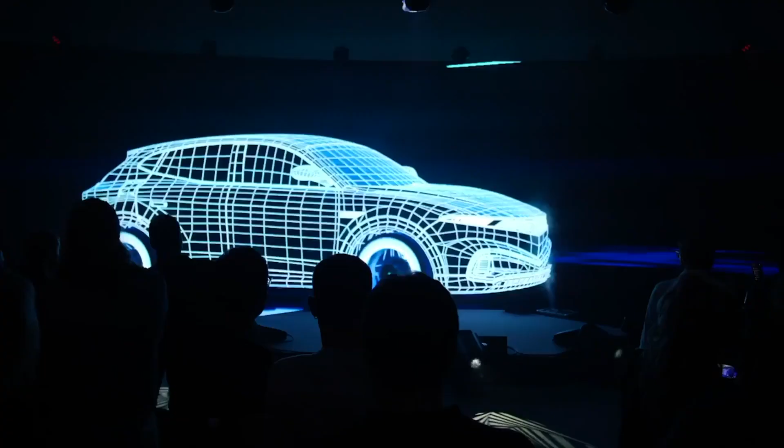The Zero Prototype Summit, or ZPS, is our annual 3-day flagship event. This is hosted at our VI Grade Sim Center in Udine, Italy, and is focused on the latest technology in simulation, driver-in-the-loop simulators, and hardware-in-the-loop for vehicle dynamics, NVH, ADAS, HMI, and motorsport applications. It's tailored to customers, partners, and prospects from global automotive OEMs, Tier 1 suppliers, universities, and research centers.

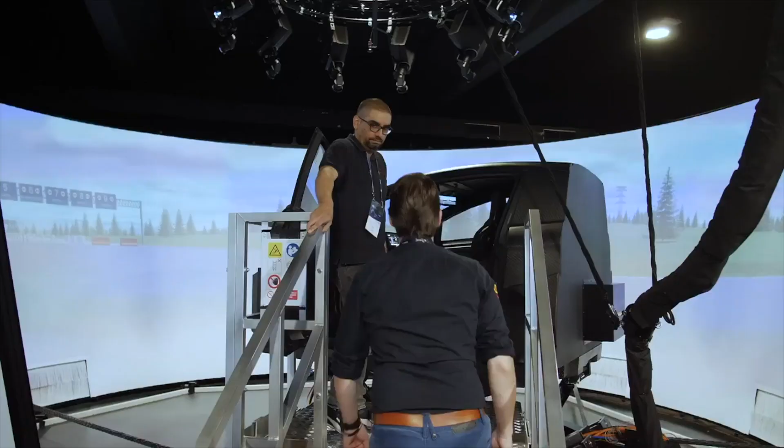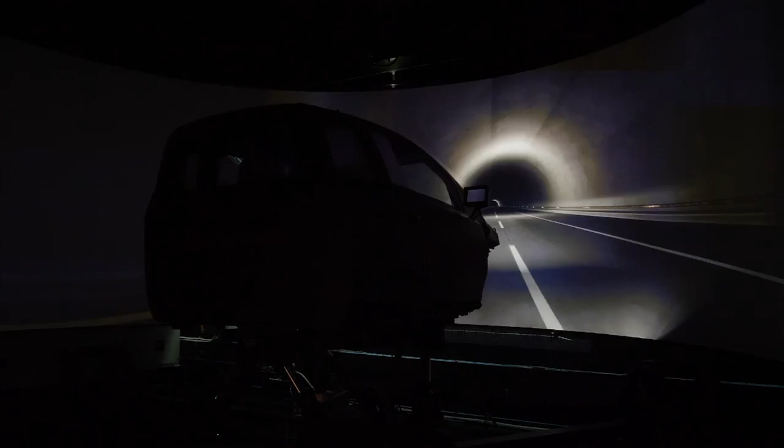It features customer presentations, live demos, software training, user groups, and numerous networking opportunities. It showcases virtual tests towards the zero prototype vision. So that's the zero prototype vision that VI Grade has created and been promoting, including simulation software, driving simulators, hardware-in-the-loop technology, and more.

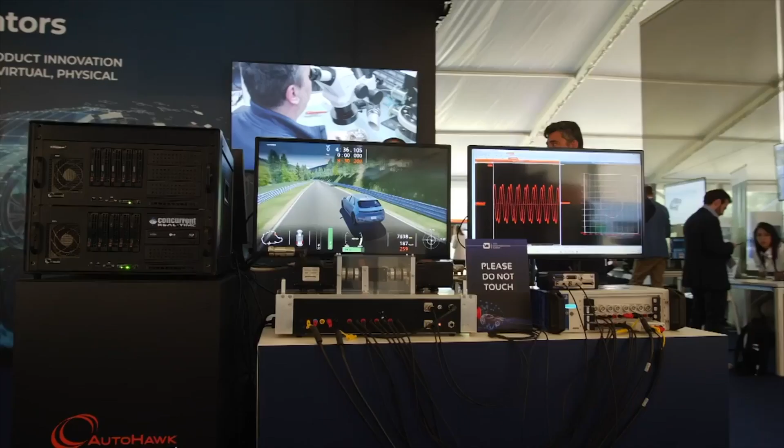There were nearly 300 in-person attendees from 24 different OEMs and 17 different Tier 1 suppliers and service suppliers, and 6 different academic research institutions. We also had 27 industry sponsors.

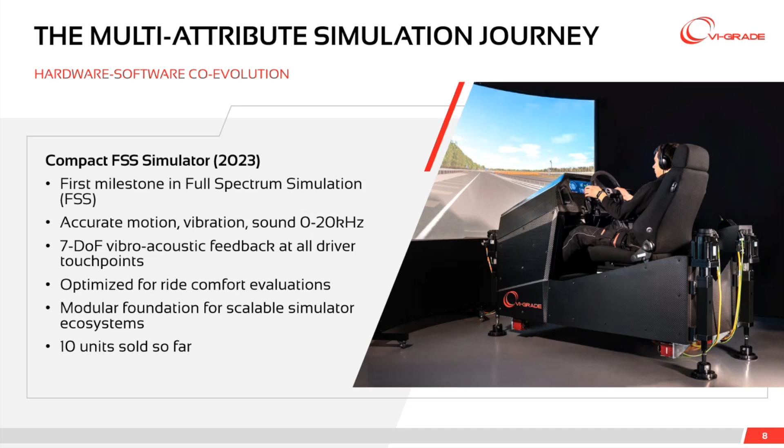In the Compact FSS, motion and low-frequency vibration are provided by the 4 corner leg actuators, and higher frequency vibration is provided in 7 degrees of freedom with shakers at the steering wheel, seat, and floor positions.

Last year, we announced the Full Motion Full Spectrum Simulator, expanding on the multi-attribute theme and bringing together a 9 degree of freedom motion platform with the new HyperDock cockpit. The Full Motion FSS is the first and only real-time dynamic driving simulator that provides a complete experience of accurate full motion, vibration, and sound over the full spectrum from 0 to 20 kilohertz.

The key enabler of the DIM FSS is the HyperDock. The HyperDock is the highly optimized carbon fiber cockpit with individual shakers at all driver touchpoints to deliver accurate vibration to the driver in 7 degrees of freedom, along with highly accurate sound.

Both the Compact FSS and DIM FSS are already very successful, with several companies already adopting them in their development cycle. To date, 10 customers are utilizing the Compact FSS, and a further 4 have invested in the DIM FSS and HyperDock technology.

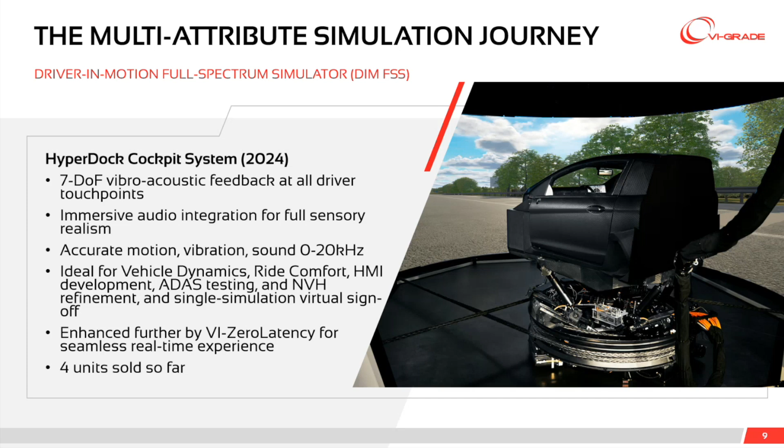In the last 10 years, VI Grade kept developing simulators with increased acceleration capability, minimized latency, and improved dynamic quality. We have made virtual driving more accurate, helping engineers make confident design decisions based on the feel and behavior of digital virtual prototypes. Now, we are launching a new product, the newest member of the VI Grade driving simulator family, and the latest step in the multi-attribute journey, the 6 degree of freedom motion platform, HexaRev.

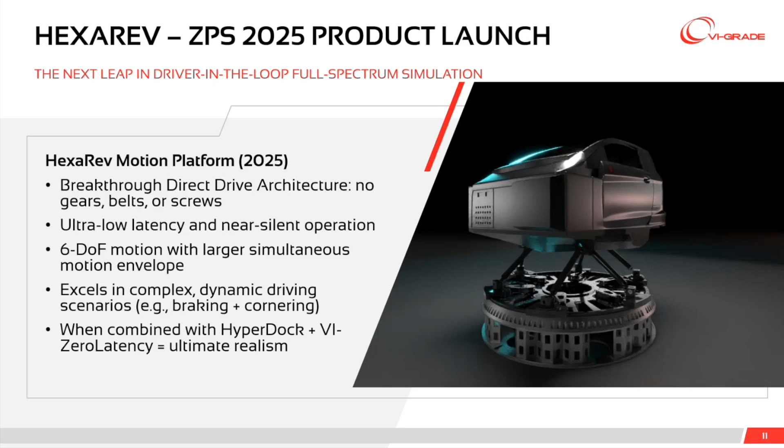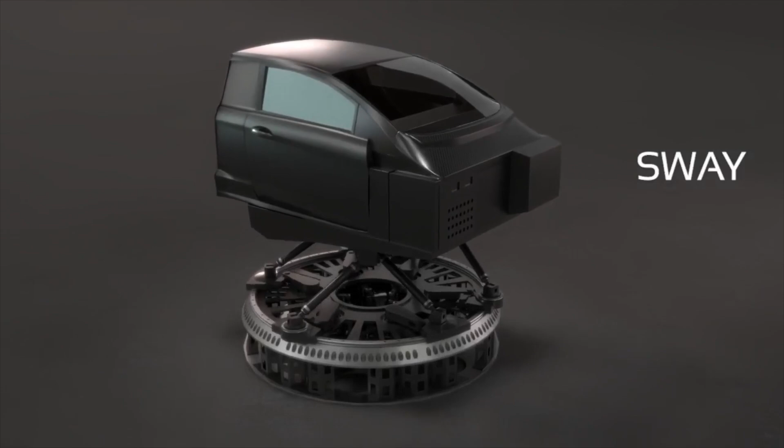This is the HexaRev, a completely new 6-degree of freedom motion platform with ultra-low latency and near-silent operation. The HexaRev platform is VI Grade's most advanced motion system to date. It combines mechanical innovation with a simplified design to deliver a driving experience that is smoother, quieter, and more immersive than anything previously available.

At its core, HexaRev is a high-performance, high-precision, 6-degree of freedom platform capable of generating exceptionally accurate vehicle motion. With no gears, belts, or ball screws, sources of mechanical play, latency, and noise are eliminated. Motion is immediate and virtually free of unintended spurious vibrations.

The HexaRev offers a significantly larger simultaneous motion envelope compared to traditional 6-degree of freedom systems. Traditional platforms experience a reduction in motion range when multiple degrees of freedom are active, making complex maneuvers less realistic. In contrast, HexaRev maintains a larger motion envelope even during complex multi-axis movements, delivering about 50% greater motion envelope capability relative to its footprint.

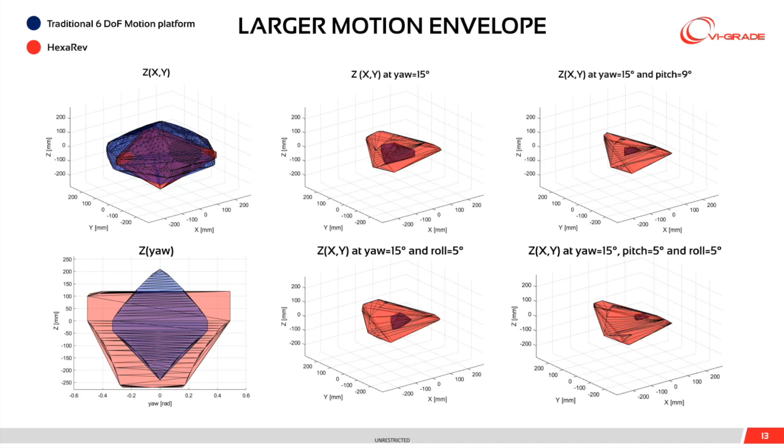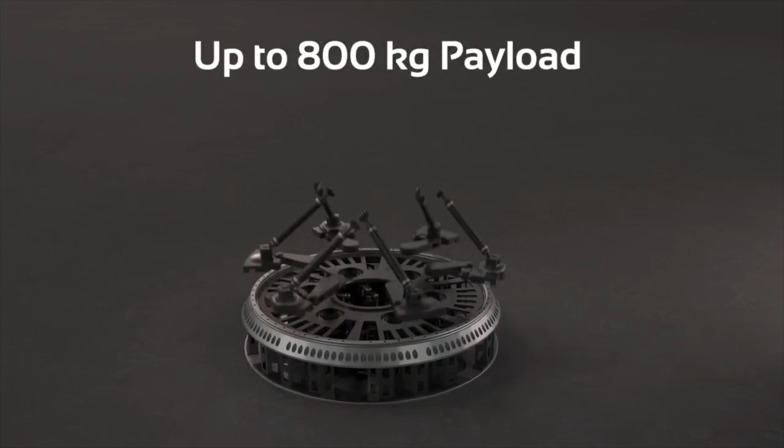Now let's take a closer look at the architecture that powers the magic of HEXAREV. The system is built around 6 motors concealed within a circular frame, each connected to a carbon fiber rod. These 6 elements work together to drive a platform that supports the cockpit, ensuring seamless motion control. This design guarantees a nominal payload of up to 800 kilograms, delivering exceptional performance and stability.

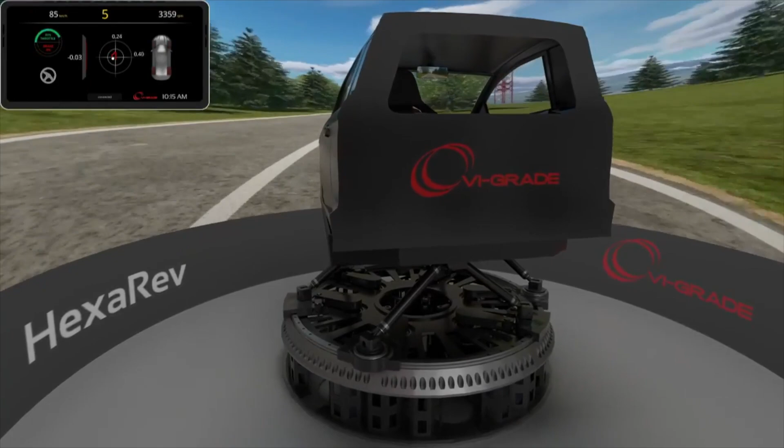Combining the HEXAREV motion platform with the HyperDock cockpit results in a full spectrum simulator. This integration marks a significant step forward in our commitment to multi-attribute simulation, enabling engineers to better evaluate ride, handling, NVH, steering feel, and other critical attributes within a single unified environment. It represents the next evolution in our technology roadmap, pushing the boundaries of what's possible in virtual vehicle development.

With the combination of HEXAREV and HyperDock, we deliver a driving experience that sets a new benchmark for realism and precision. The system provides true 6-degree of freedom motion to replicate vehicle dynamics with exceptional fidelity, along with vibration across all driver touchpoints, ensuring that every nuance of road surface and vehicle response is accurately conveyed.

Complementing this physical realism is an immersive and precisely engineered audio environment that captures the full spectrum of vehicle and road sounds. Together, these elements create a seamless simulation experience that enables engagement with digital prototypes as if they were real vehicles.

One of the key features of HEXAREV is its modularity with existing VI-grade technology. In particular, it allows for seamless switching between compact, HyperDock, and racing cockpits. Add to this VI-grade zero latency technology, and the result is an unmatched simulation environment where human drivers can experience ultra-realistic driving sessions with their digital virtual prototypes and make critical design decisions with confidence.

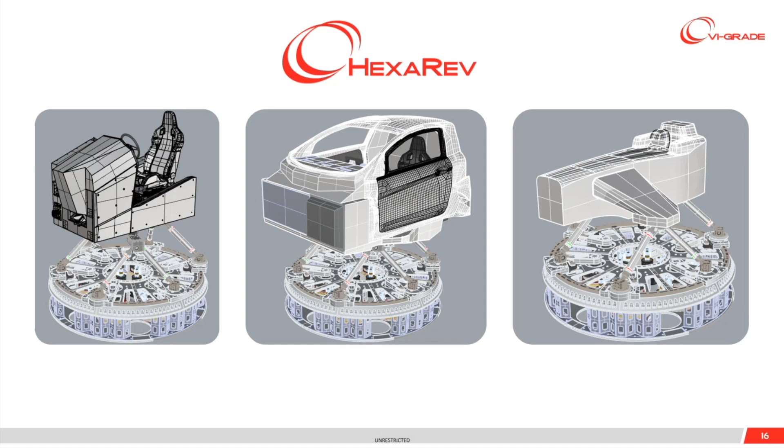So the next major announcement from our 2025 Zero Prototype Summit is VI Data Drive Cloud. Vehicle development is more complex than ever, with deep software integration and a need for realistic, large-scale simulation. That's why we built VI Data Drive Cloud, a cloud-native platform offering scalable computing, centralized data, and team collaboration.

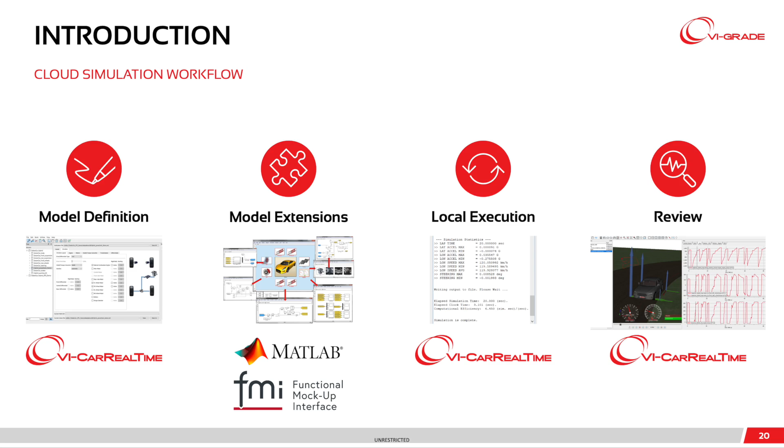Fully integrated with VI CarRealTime, it enables parallel simulations for high-performance runs, DOEs, and diagnostics, breaking hardware limits and accelerating insights. With support for plugins, FMUs, and actuator extensions, as well as customizable post-processing, it's built for real-world development at scale.

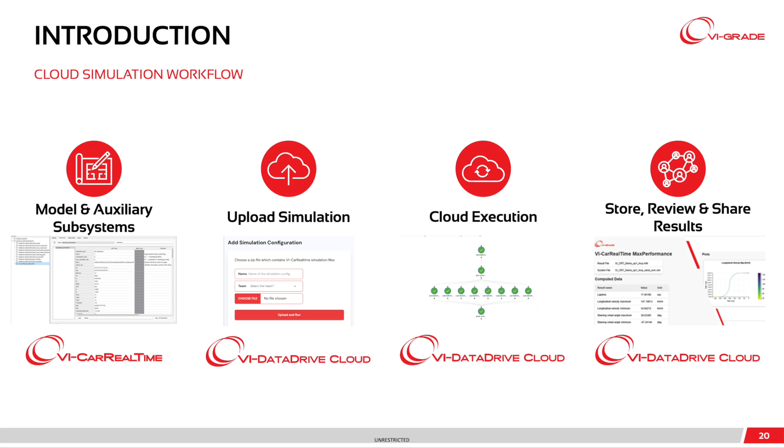This is part of VI-grade's DataDrive vision, where offline simulation, driving simulators, and cloud computing come together to fully support the digital workflow, enabling and accelerating the development of software-defined vehicles. VI-DataDrive Cloud gives you scalable and efficient simulation, increased flexibility, better teamwork, and ultimately gives you the answers you need for faster decisions.

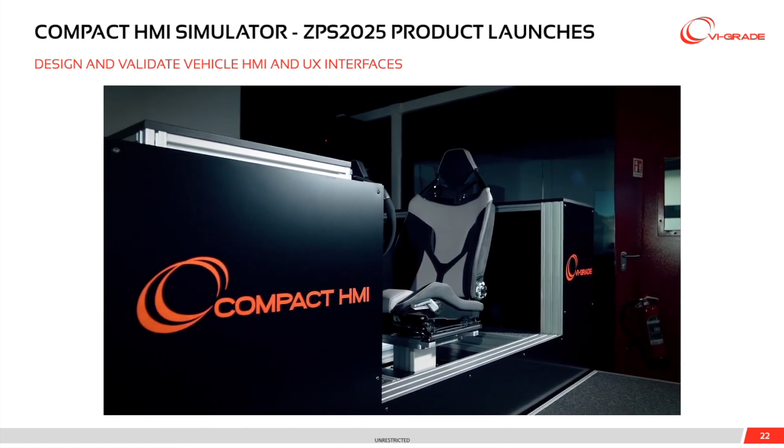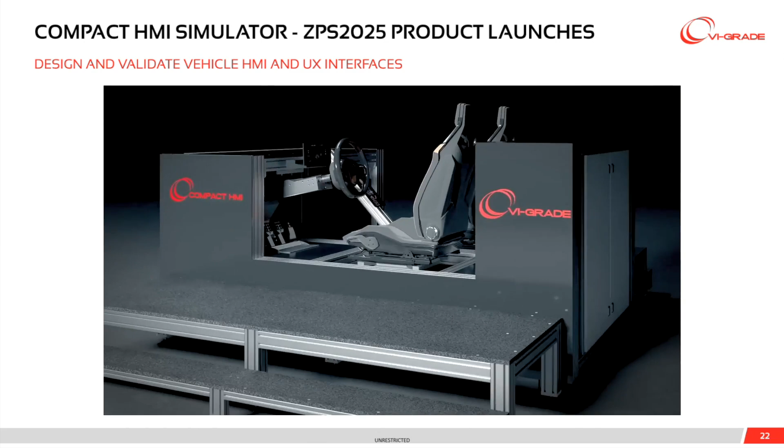And the final product announcement for the 2025 Zero Prototype Summit, we have the compact HMI simulator. HMI studies are often carried out on static vehicle bucks or bespoke mock-ups that are only suitable for that vehicle type. When adjustable mock-ups are used, they're often only that, adjustable mock-ups, able to assess positioning and content of the HMI systems, but not including any capability to really drive the vehicle and assess the HMI under driving conditions.

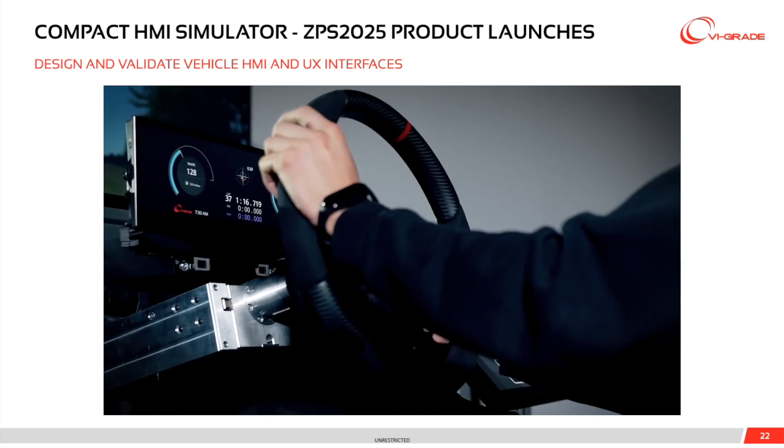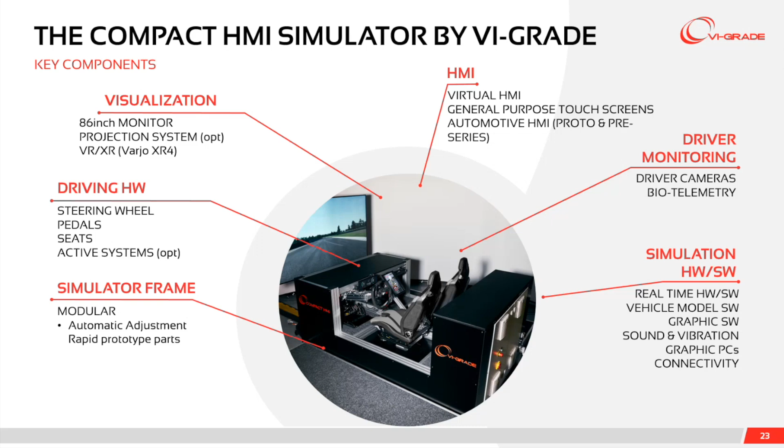The compact HMI simulator is designed to accelerate HMI development by merging flexible interior simulation with realistic, real-time driving experience, AI-powered traffic scenarios, and hardware-in-the-loop and software-in-the-loop integration. The compact HMI simulator is highly adjustable and provides the ability to simulate the driving position for many different types of vehicles in a single simulator.

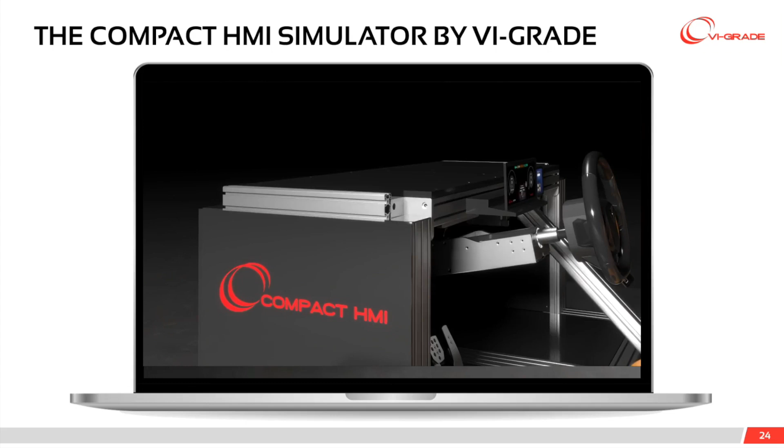The wheel and dash height can be adjusted along with the wheel angle and position. The pedals adjust vertically, fore, aft, and laterally. The seats also adjust in all three translational directions. And all of these adjustments can be controlled through a tablet touchscreen interface, and saved configurations can be recalled and applied in an instant, enabling quick transitions between different vehicle setups.

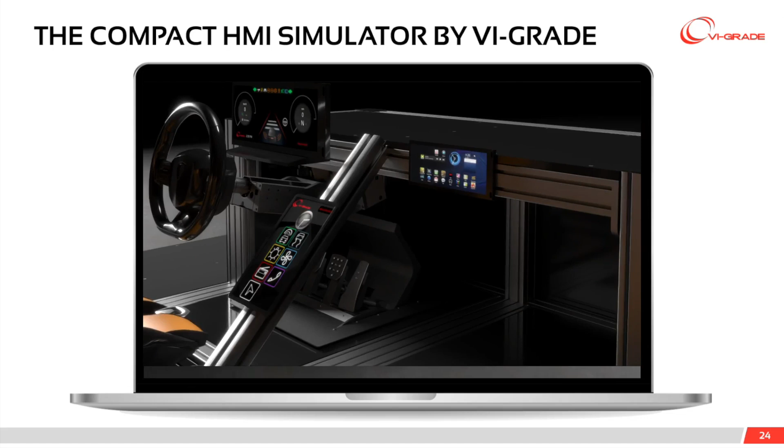The compact HMI simulator can adjust to the seating positions of virtually any passenger car vehicle, from sports cars to SUVs. Provided with 3 screens for customizable content, any number or type of screens can be easily added and positioned in the cockpit.

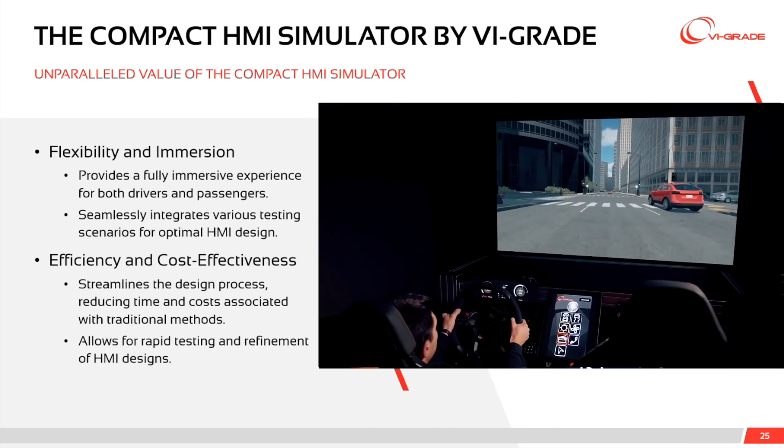The thing that really sets the compact HMI apart is not just its flexibility, but that it is also a complete, fully functional, interactive, real-time driving simulator. So HMI functionality can be tested not only on a static mock-up, but also in action in a variety of different driving scenarios with different weather conditions and different traffic conditions, and even combine this with ADAS features.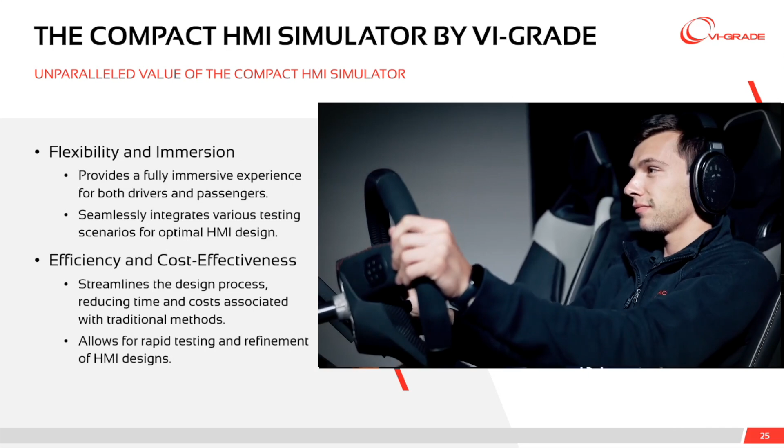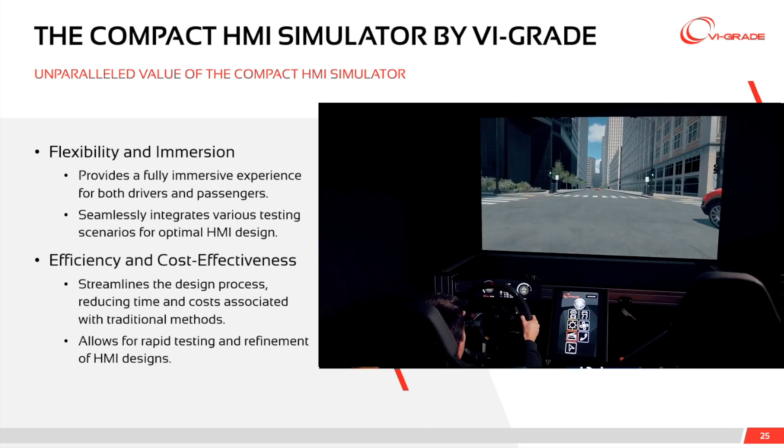VI SimSound completes the experience, adding immersive sound to the driving simulation. And the compact HMI simulator can be equipped with virtual reality or augmented reality technology to further increase immersivity and provide the ability to see the virtual mock-up of the virtual prototype interior.

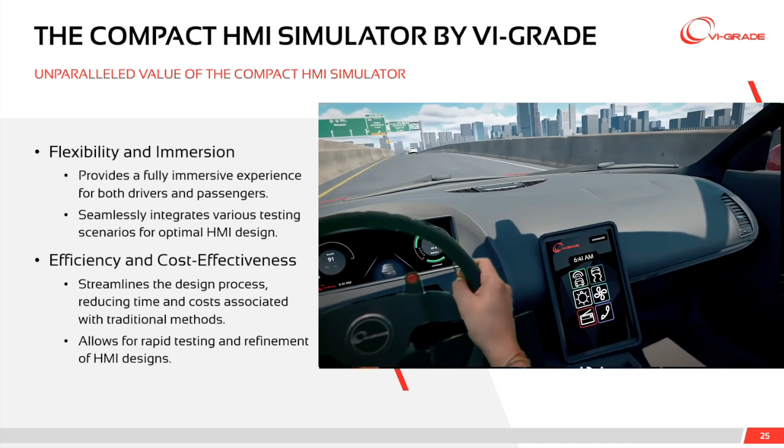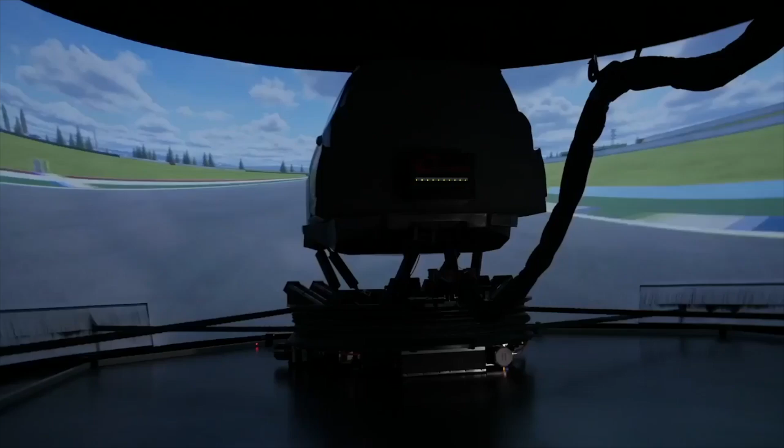Now, I also wanted to take a moment to mention the VI-grade virtual proving ground. While not a new release of the 2025 ZPS, it is a recent release and a very powerful and valuable addition to the entire VI-grade product suite. The VI-grade proving ground is a virtual proving ground consisting of all common proving ground tracks and features in a single unified virtual proving ground track.

And all demonstrations of the 2025 ZPS were utilizing the VI-grade proving ground. In fact, this virtual proving ground contains over 50 kilometers of roads, 13 different tracks for driving areas, and is suitable for the entire range of excitations and events.

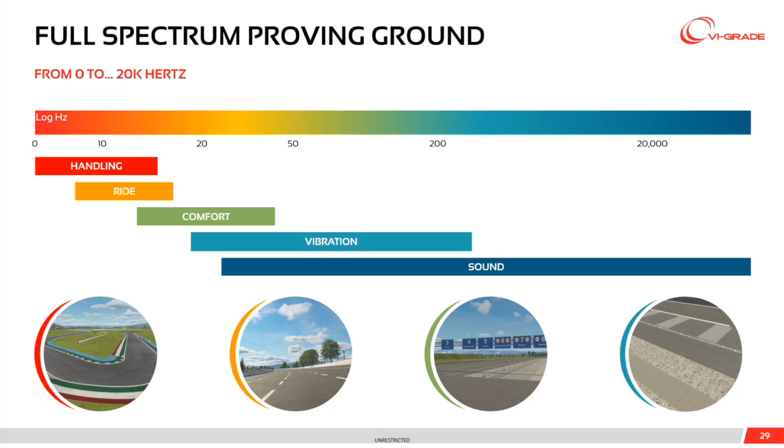The VI-grade proving ground is suitable for our multi-attribute simulations and our full spectrum simulators. The proving ground is a full spectrum proving ground, supporting a variety of types of virtual testing from handling and ride to comfort up to NVH, vibration, and sound. The VI-grade virtual proving ground is integrated with all of the VI-grade software products and is ideal for virtual testing of vehicle dynamics, NVH, HMI, and ADAS.

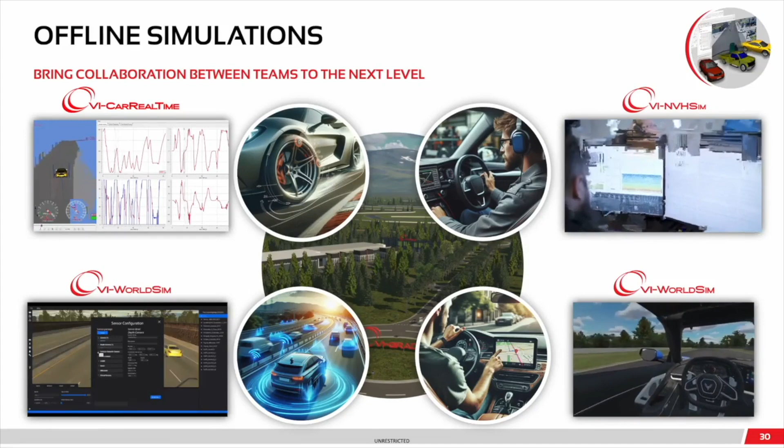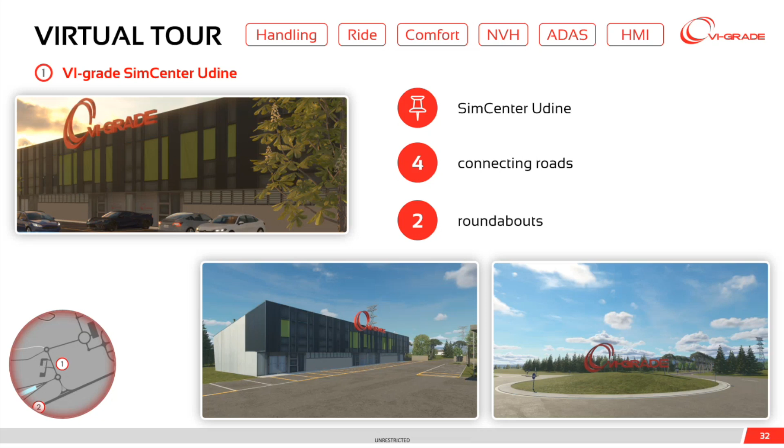Here's an overview of the virtual proving ground, and I can quickly take you through all of the different areas. To start with, we have our central hub. And this is actually a virtual representation of our VI-grade sim center in Italy. We have our high-speed ring. The longest straight here is 2.5 kilometers.

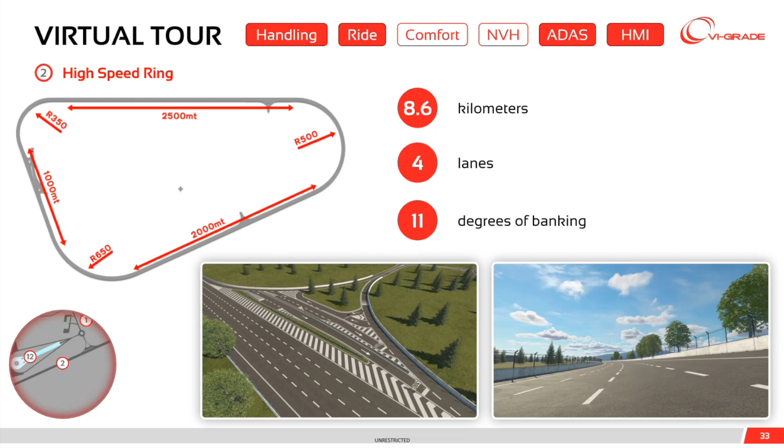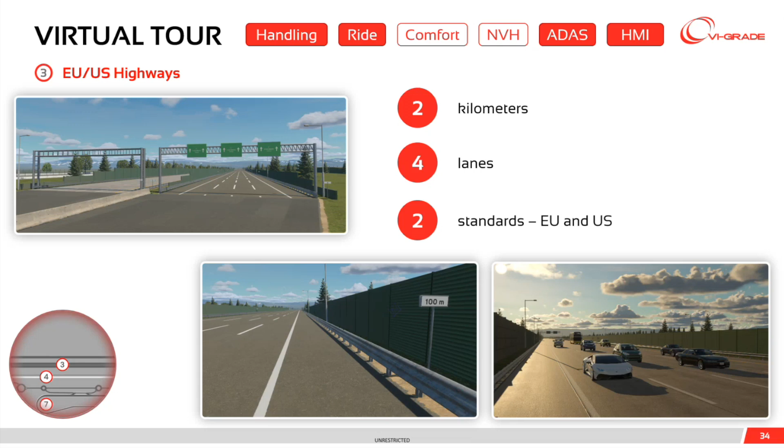We have a highway section that is 2 kilometers long that represents both EU and US highways. So one direction and one set of lanes is for EU highways, and the other direction and other set of lanes is a US highway with all of the appropriate signage and so forth.

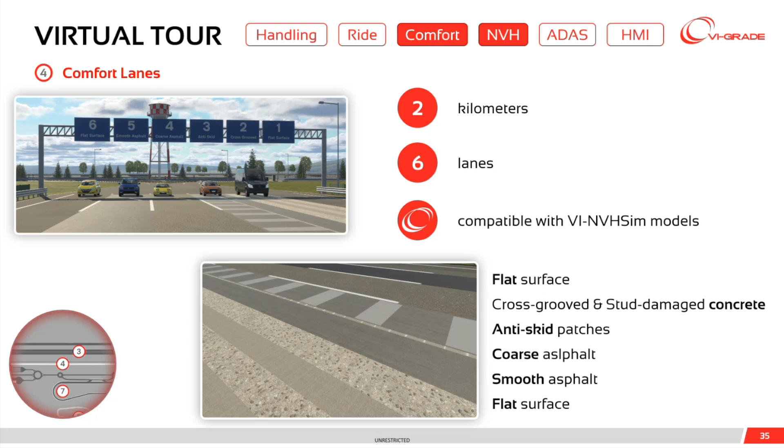We have our comfort lane section. This is also 2 kilometers long. It's got 6 lanes of various different surfaces to provide different excitations to the vehicle. So it's got a flat surface, coarse asphalt, smooth asphalt, and so forth. Next, we have a ramp area with 6 different incline or ramp sections.

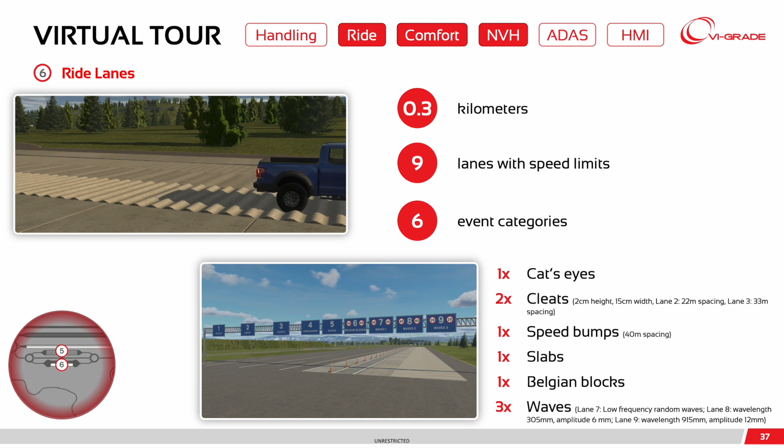We have our ride lanes. Here we've got 9 different lanes with various different features on those. So cleats, speed bumps, Belgian blocks, sine waves, and so forth. We've got a handling track with curves and high-speed sections and low-speed sections. We've got a rally track

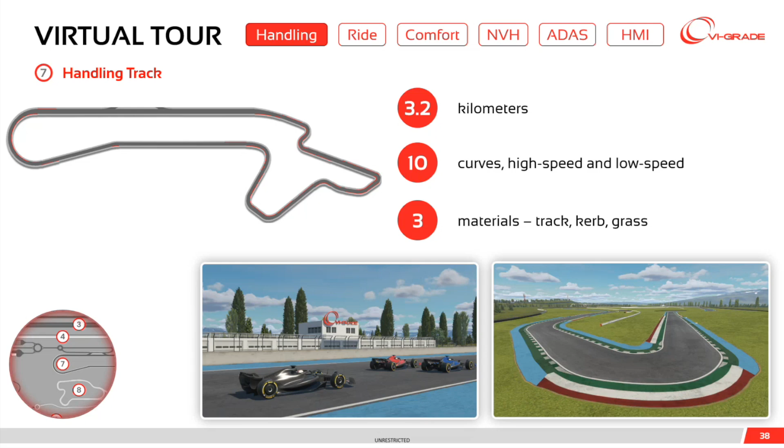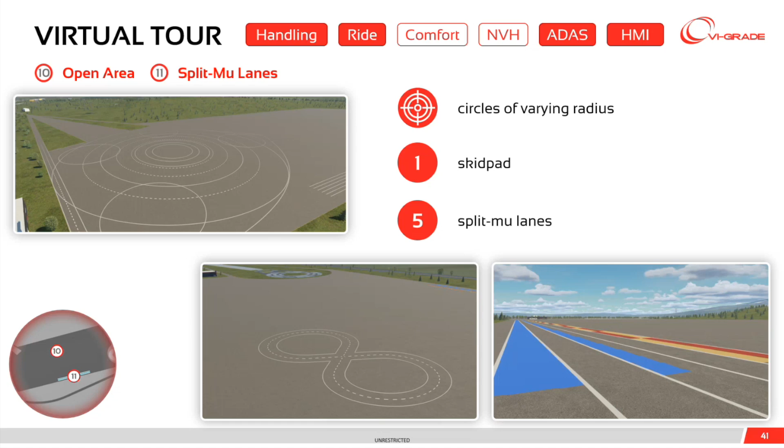and a country road. Now, this country road is actually a real country road that exists in real life. It's been laser scanned, so it's an accurate digital representation of a real road. It's about 2.5 kilometers long. Of course, we have an open area here for doing vehicle dynamics testing. It also has a section with split mu lanes with different friction coefficients on each one.

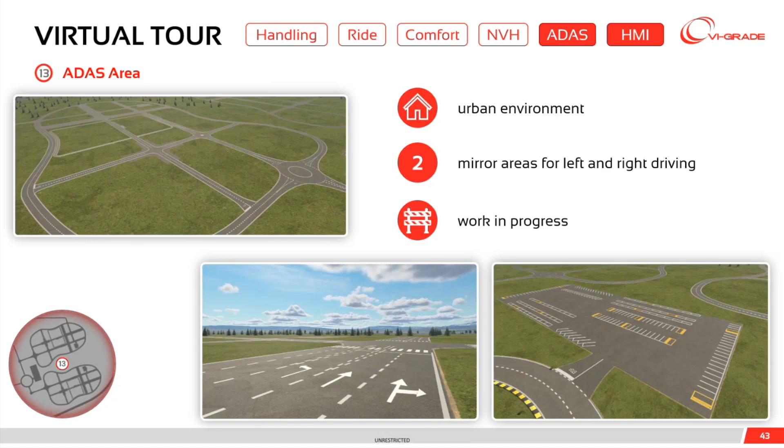We have a wet handling area and an ADAS test area. So the VI-grade virtual proving ground provides the visual environment and track surfaces for almost any type of virtual testing you may require.

All right, so getting to the presentation section of the Zero Prototype Summit. Over the course of the 2 days of the Zero Prototype Summit, there were more than 30 presentations demonstrating how automakers and their suppliers are making strides towards achieving the Zero Prototype vision, showcasing advances in vehicle dynamics, NVH, ADAS, HMI, and motorsport applications. I'm going to share just a few highlights with you today. So first is Porsche Engineering.

Porsche Engineering is leveraging modular, standardized XIL, or everything in the loop architectures, to accelerate and streamline development and validation across the entire automotive lifecycle. The team showcased how simulation, AI, and big data integrate with early, continuous, and automated testing, from software in the loop to driver in the loop.

Their simulation environment relies on clearly defined interfaces and reusable components, enabling seamless model exchange across SIL, HIL, VIL, and DIL. Use of ASAM standards like OpenDRIVE and OpenSCENARIO ensures interoperability and tool-independent reuse of scenarios and tracks. Procedural track modeling pipelines create high-fidelity, simulation-ready 3D environments within minutes, supporting scalable and reproducible testing. Driving simulators are used to bridge virtual and real testing, allowing validation of complex driving functions such as ADAS and handover situations.

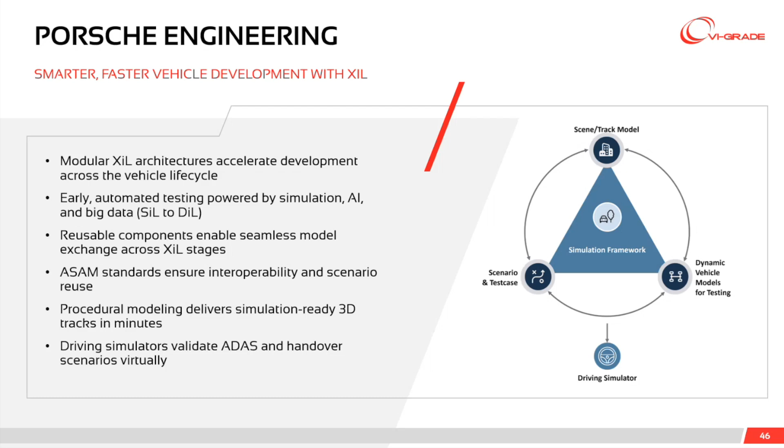So here, the team's challenge had to do with increasing system complexity and the need for efficient, traceable, and scalable validation, which posed limitations to conventional test methods and simulation toolchains. Integration gaps and non-standardized components slowed down their development cycles. So Porsche Engineering implemented a modular, standardized simulation framework using VI-grade tools, integrated with their in-house ecosystem. This setup supports consistent reuse of track, scenario, and vehicle models across all XIL levels and utilizes procedural 3D track generation for rapid environment creation.

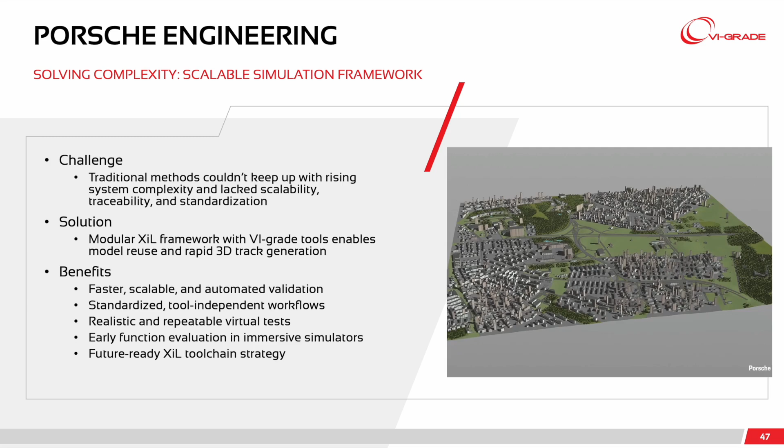So some of the benefits of this: they have faster development and validation thanks to this scalable and automated test execution. They have toolchain independence through standardized data formats and interfaces. They get high realism and reproducibility in virtual testing environments. They have immersive early stage function evaluation using advanced driving simulators. And they get strategic alignment of XIL toolchains as innovative enablers of future mobility.

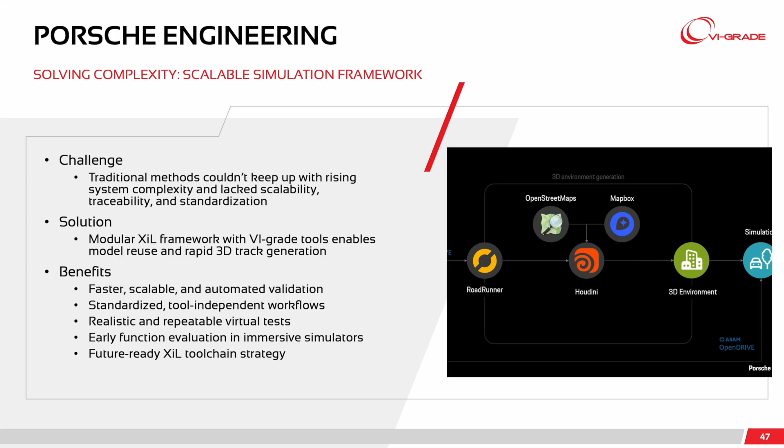So next up, I want to highlight the Bridgestone presentation. So here, digital transformation is key to tire innovation. Bridgestone is investing in virtual tire development workflows to reduce prototype iterations and development time. The emphasis here is on sustainability. Virtual methods help minimize physical testing, cutting down on material waste and energy consumption. Simulation accuracy is crucial. Achieving fidelity between simulated and real-world tire behavior is central to reducing reliance on physical tests.

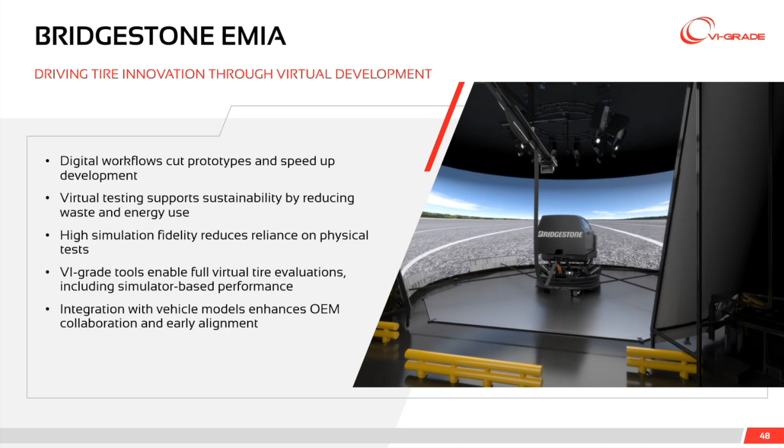VI-grade tools are enabling end-to-end virtual tire evaluations, including dynamic driving performance in simulator environments. The integration of virtual tires in full vehicle simulation environments allows better OEM collaboration and earlier design alignment. So traditional tire development requires extensive physical prototyping, leading to long lead times, high costs, and unsustainable resource use. Ensuring accurate prediction of real-world performance was also difficult.

So Bridgestone implemented a virtual tire development process, leveraging VI-grade simulation platforms, including VI-CarRealTime and driving simulators, to test and validate tire models early in the design phase. So out of this, they get a 60% reduction in prototype iterations. They accelerate development timelines and improve collaboration with OEMs. They get enhanced sustainability by cutting physical testing and material use. And they improve prediction accuracy of dynamic performance and customer satisfaction.

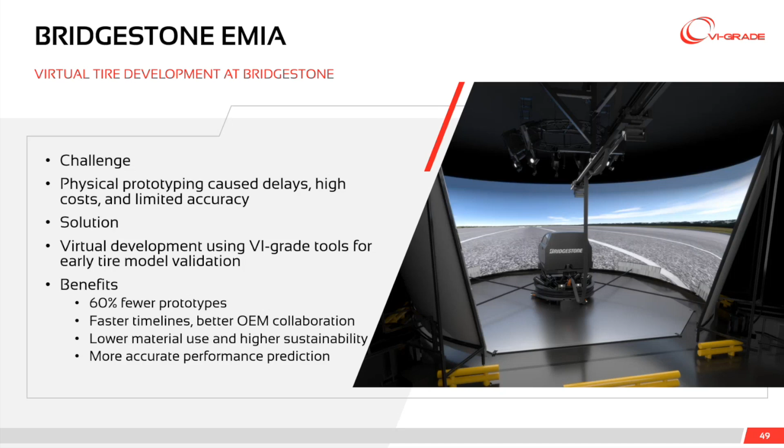Next, we have EDAG. EDAG has launched a dedicated Zero Prototype Lab in Wolfsburg, combining virtual development, real-time simulation, and cross-domain engineering to eliminate physical prototypes. This lab includes a DiM500 high dynamic simulator, a compact full spectrum simulator, and desktop tools to enable scalable simulation from early stage model function testing to full vehicle dynamics and NVH evaluation.

EDAG integrates digital twin methodologies for simulation-based tuning and validation across domains like steering, NVH, lighting, suspension, and tire development. This unified simulation pipeline allows a 10,000 times faster virtual loop, drastically improving tuning cycles and enabling development decisions under repeatable conditions.

The emphasis here is on multi-attribute development. Vehicle dynamics and NVH teams work jointly, supported by tools like the Hyperdock for immersive feedback and validation. This lab enhances sustainability, reduces development time, and supports safe and fast tuning without the need for physical prototypes.

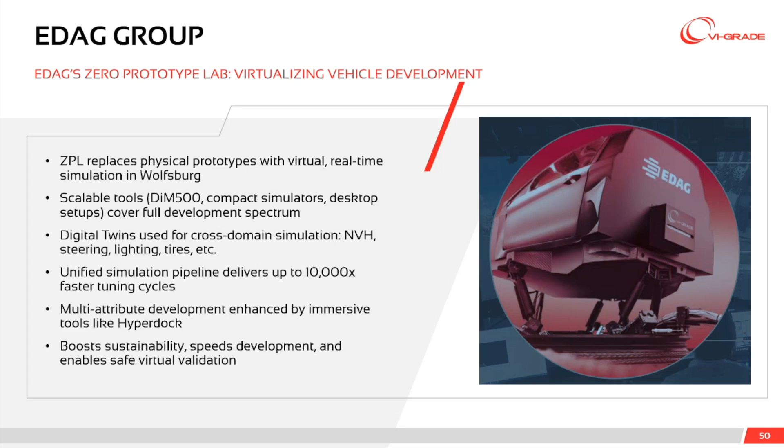So EDAG realized they needed to reduce time and cost associated with physical vehicle prototyping while maintaining high accuracy across complex domains like vehicle dynamics, NVH, and lighting. Conventional development processes lacked integration and flexibility for fast iteration. So EDAG built the Zero Prototype Lab, a virtualized test and development facility powered by VI-grade simulation technology. It supports real-time, multi-domain simulation using high-fidelity models and dynamic simulators integrated in a closed-loop workflow with digital twins.

This provides massive efficiency gains with up to 10,000 times faster simulation loops in the development stages. It provides reduced reliance on physical prototypes, leading to cost and time savings. They get high-fidelity results through one-to-one cueing and repeatable simulation setups. They achieve cross-domain collaboration on a unified platform, which improves tuning quality and reduces siloed workflows. And all of this results in safe, sustainable, and scalable vehicle development from concept to validation.

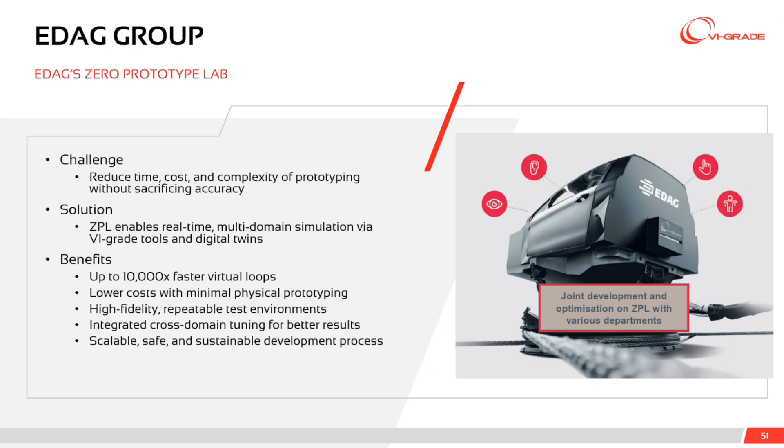And finally, we have a presentation from Ford Germany. So Ford utilizes the VI-grade NVH desktop simulator and NVH compact simulator at their Cologne Development Center for the NVH development of the new electrified Ford Puma Gen-E, enabling virtual evaluation and sound prototyping early in the development phase. The simulator was used to auralize and subjectively assess analytical data, drastically reducing the need for physical prototypes. 75% of the final propulsion sound design was developed virtually.

Key sound design challenges included tonal sound characteristics of electric vehicles, which differ significantly from traditional internal combustion engine vehicles. Simulation bridged the gap between objective acoustic metrics and subjective perception. The team used the simulator to iterate designs rapidly, test transfer functions, and simulate real-world conditions using TPA models. A high correlation was achieved between simulator outputs and real-world vehicle measurements, proving the accuracy and reliability of virtual NVH evaluation.

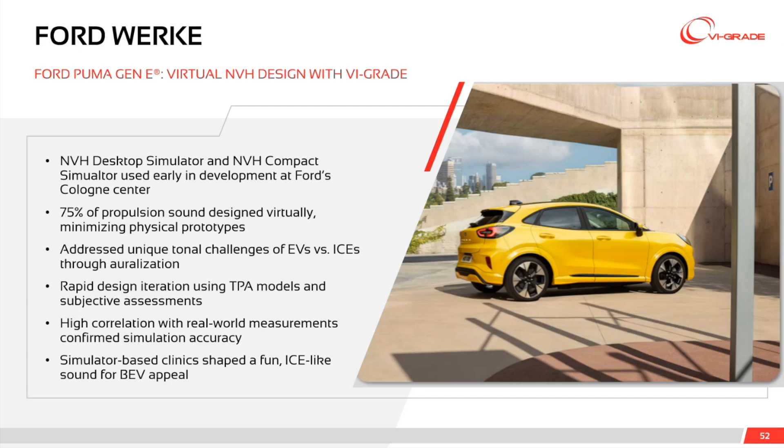Simulator-based clinics involving Ford management and customers helped refine the propulsion sound to appeal to internal combustion engine customers, creating a fun-to-drive sound feedback experience. So the big challenge here is that electric vehicle NVH differs significantly from internal combustion engine NVH in tonal characteristics and acoustic masking dynamics. Ford needed a fast, accurate, and immersive way to develop and refine sound quality targets for the Puma Gen-E, especially in early development stages, without relying heavily on physical prototypes.

So they implemented the VI-grade NVH desktop simulator and VI-grade compact simulator to perform auralization, design iteration, and sound quality evaluation, integrating active sound design into this process. The process included subjective-objective alignment, TPA modeling, and automated data processing to optimize efficiency. So the result, they were able to do up to 75% of sound design and get that finalized in a virtual environment. They could do same-day subjective evaluations, supporting fast decision-making. They achieved improved efficiency, realism, and cross-functional collaboration.

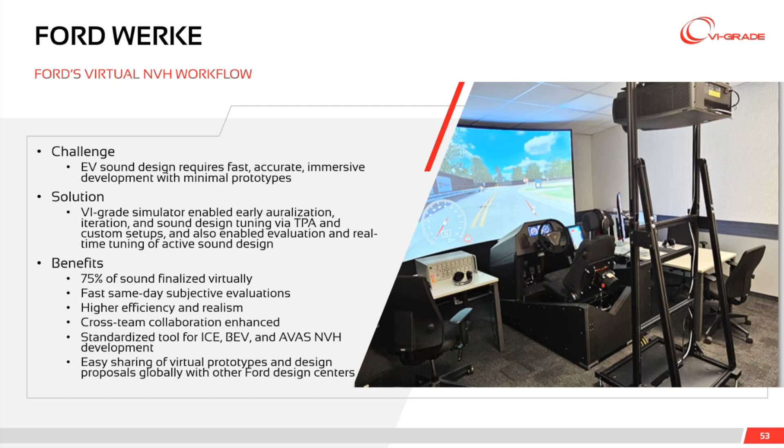The active sound design helped position the Puma Gen-E as an emotive, sporty battery electric vehicle that appealed to traditional internal combustion engine drivers. The NVH simulator has become a standard development tool at Ford globally for NVH target setting, design, and development. And one of the things that this enables is the easy sharing of virtual prototypes and design proposals globally with other Ford development centers. It's very easy to take a virtual model and send it in just a few minutes to another development center for somebody to listen to.